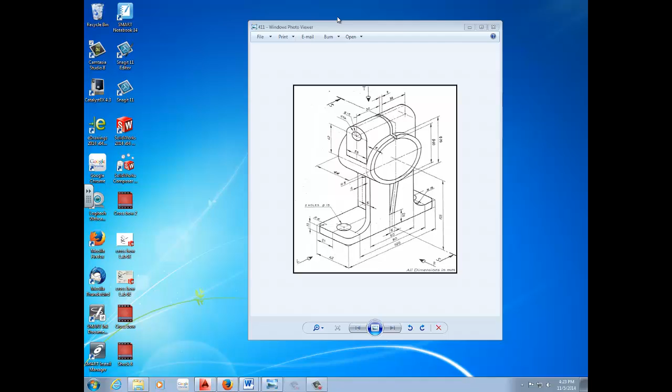So we're going to be working on this project called 411. Basically, it's what you see on your screen right now. What we're going to do is design it in 3D and then make a flat shot to get the 2D drawings out of it. The fillets, don't worry about those till the end because they'll just make you confused. Once we have all parts put together, we union it and we put the fillets.

So we start out with the base, which is 42 by 120. So we go to rectangle command, click anywhere on the screen, D for dimension, we go 120 for the length, and 42 for the width. We place it on the screen by selecting our left mouse button.

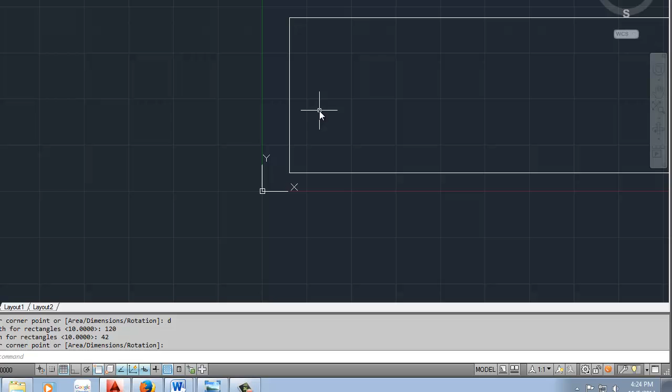Okay, so we have a base square. We're going to add these circles, which we need to place into the right location. To do that, I usually draw reference lines. So looking at the drawing, the circle here is at center. So I make sure that I have a midpoint OSNAP active. I hover over the vertical line here, and I draw a line across.

Is it specified on the drawing? Actually, it doesn't specify. It specifies the distance between the two holes, which is 90, minus the 120, gives us 30, divided by 2. So 15 is the center of our circle here. We draw a circle at that point. The diameter is 15.

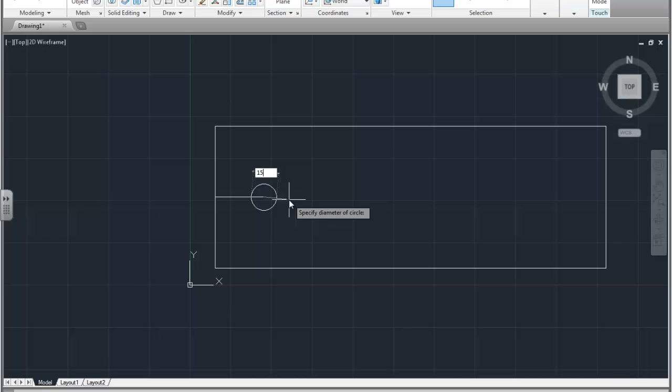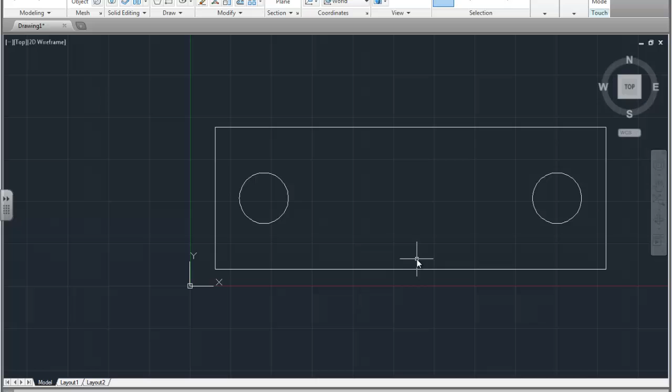And to make this project a little faster, all we have to do is mirror this over. So we use the mirror command. Modify mirror, select the circle, and we're going to create a line, an axis from the midpoint to the midpoint, and we accept. That gives us the base, which is 2D, which at this point we want to make 3D, so we do the press pull.

You can either put the fillets at the corners here now in the 2D drawing, or you can do it later in the 3D model. It's up to you. Both will work. We'll leave it for later. I'll try to keep fillets at the end. So what we're going to do is press pull, select the object, and the thickness is 10.

I'm going to change my view from 2D wireframe to conceptual. Gives me a better visual view of this. I'm also turning off my grid because I don't like using the grid. So that's my first piece, which is the base. Next piece is going to be, well, it depends on which way we want to work it out.

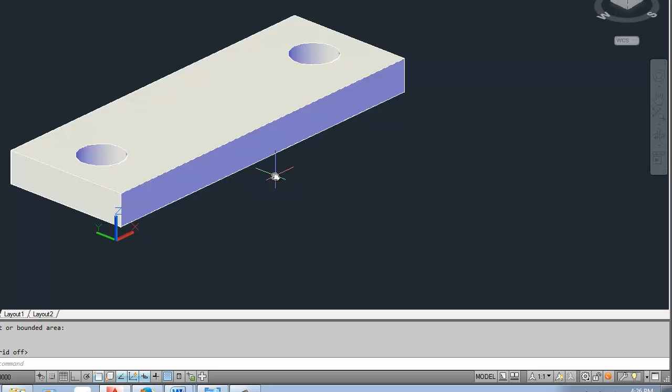We're going to have to work this piece here. It's going to be tricky because it has a circle that's centered. So we might just have to draw the whole front with the circle, and then we'll use the circle to create the actual cylinder. This might be the easiest way of doing this. And the final part, we'll do this top piece here a bit later.

But we don't want to cut the hole yet until we have this top piece here, because otherwise it'll be really hard for us to do that unless we cut through twice. You'll see what I mean in just a bit. So basically what we have at the bottom is like a T. So we can draw it that way, or we can draw it from the front, which might be the easiest way of doing it. So we're just going to do the front view of it.

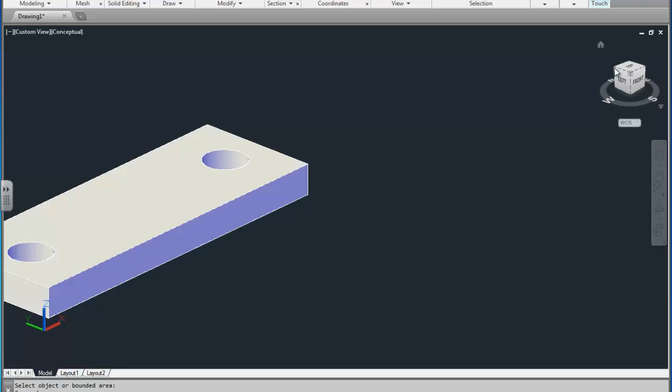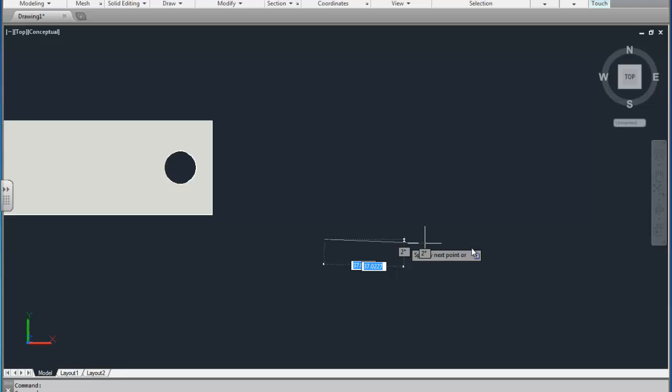We can keep on drawing this on the top. Doesn't have to be the front view because we're going to rotate it later on. So what we're going to do is create the base. So what I'm drawing now is this 60 here, from here to here, and the height I will have to figure out based on these dimensions here. So a little math will be necessary. Draw a line, horizontal, make sure you have ortho on, active, and you type in 60.

From that, we are going to draw a line that goes all the way up to the center of the cylinder at 105. We'll actually draw the cylinder now. That way it makes us understand exactly what we're drawing. So this is diameter of 70, and the inside is diameter of 60.

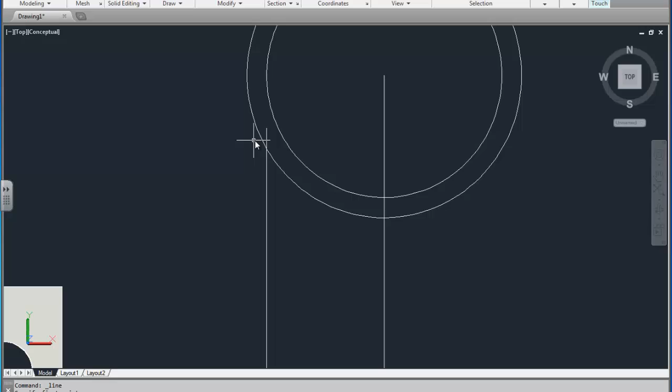We have that. Now the 60 is attached directly to the outside cylinder, so we go directly vertically up, and we trim off any material we don't need. From there, we also mirror it to the other side. Modify mirror. And we have the

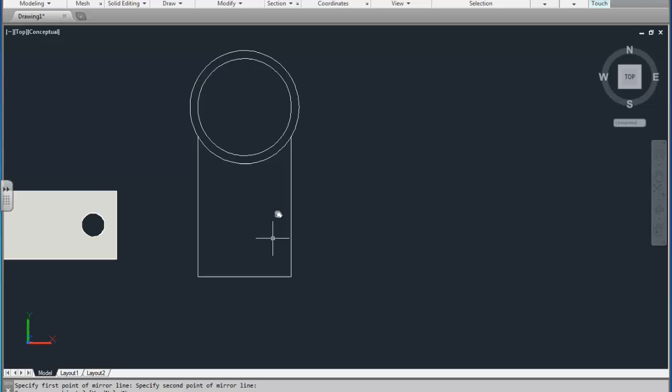base. The only problem with this is the dimension that I placed in here, the 105, is from the bottom to the center of the circle. What we actually wanted was the top plane here to the center of the circle, which is, based on the drawing here, 10 millimeters less.

So what we need to do is either stretch this up 10, or we move this up 10 and trim it. I'm going to show you guys how to stretch. Hopefully you guys know this by now. If not, this should be a good refresher.

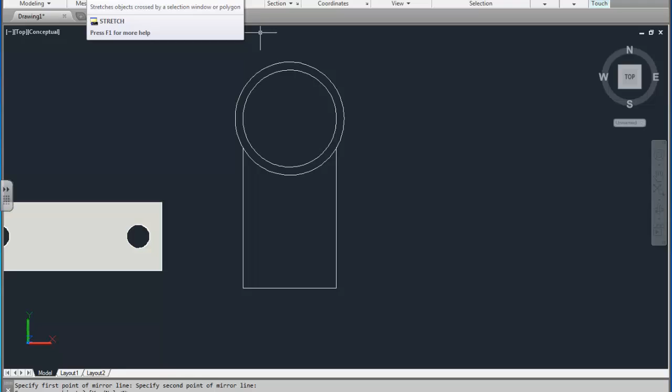We go to our stretch command, which is right here under copy. We select the bottom complete horizontal line and both vertical lines. So anything that's inside the box now gets moved. Anything that is only partially in the box will get stretched or reduced.

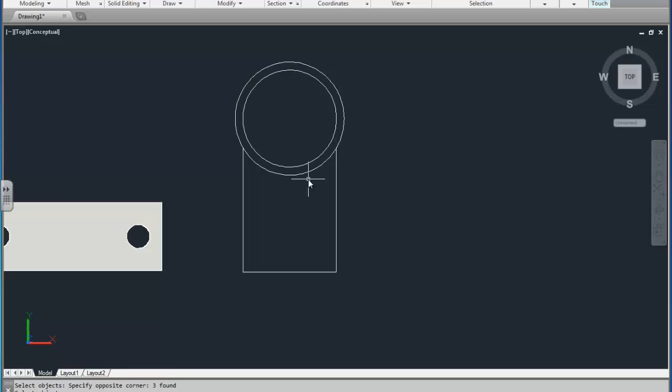So I select that object like so, and I click yes, these are all the objects I would like to select, and I click on a base point of displacement. It can be anywhere on the screen actually. So I'm going to click here, and I'm moving my mouse up, so that way it knows which direction I am stretching it, and I got to specify the distance, which is next. I'm going to specify 10. So it shortens to exact right distance.

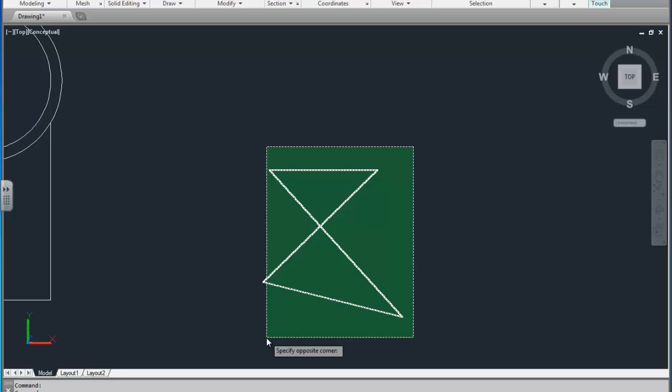Now I'm going to show you maybe a few other examples of stretch. So if I have stretch command and I select, as you can see, there's two full lines in the box, and there's 2 lines that are not completely in. When I do that, I select enter, you can see that the 2 that are completely in the box, they're there, the same exact shape, the same length.

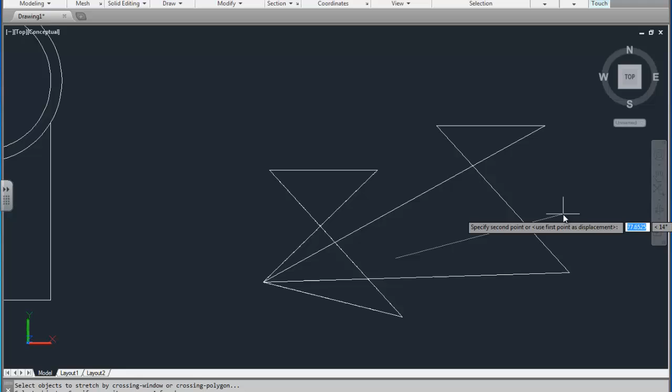They don't change. The other 2, well, they can just stretch and flip around depending on which location you're placing them. So you can really modify objects pretty fast and efficiently using stretch, but you have to get used to using it. That's the only problem. I'll try to implement it more during class so you guys get a better hang of it.

Okay, so we have the base. What we need next is we can take this part here, so we can actually trim out what we no longer need. This is the part that we want to press pull, and we have a press pull of 6 here. So you can go press pull, and we're going to type in 6.

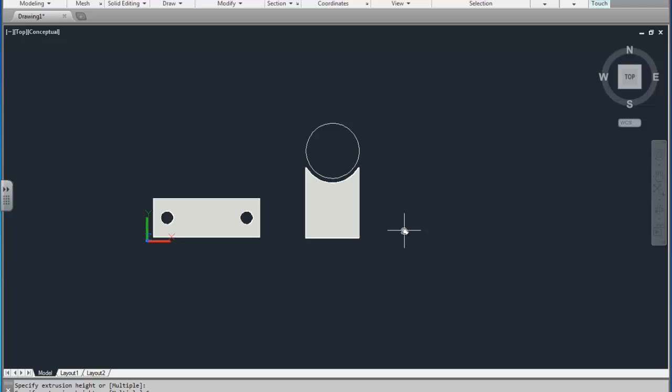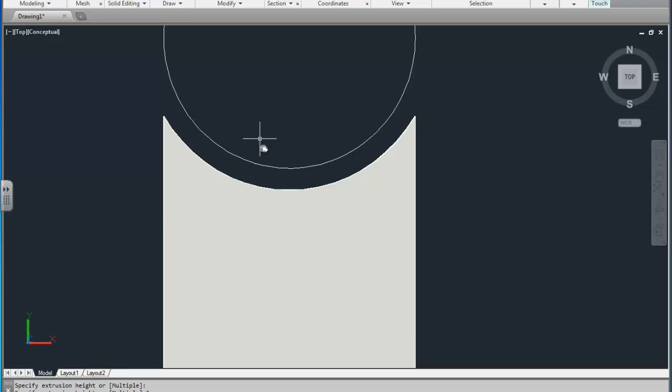In addition, there is also a triangle that we're going to have to work out. Actually, that one's going to be really tricky, but we'll be able to do that. So we have one more, the front triangle. That's the tricky part right here. There's a few different ways you can draw this. You can draw a triangle, extrude it out. The only problem with that, if you do the triangle and extrude it, it's not going to follow the curve of the cylinder. So we can't really do it that way.

What we need to do is actually get this top piece and the back, or actually we can do the bottom piece from the bottom, which is a little curved on top, and a square, and we can extrude it out and then slice it at an angle. That is one way, and there's multiple different ways you can do this. You can also do a loft, where you will create the top and the bottom, then loft it together. But that is also difficult.

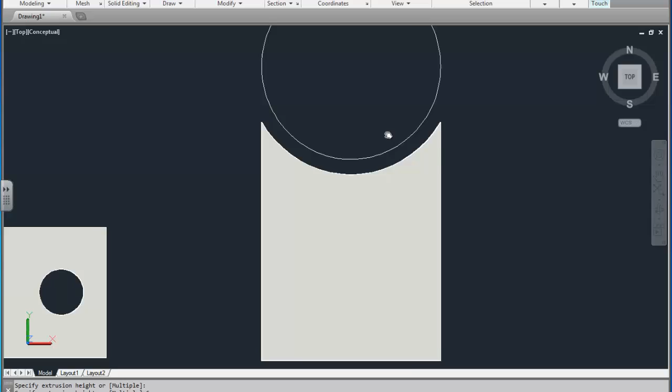So this is how I'm going to do this. Do I need to use this? No, not really. I'm going to create the same circle size that we had previously. I'm going to move it over because I no longer need it for this part. And I'm going to create this bottom piece as if I was looking from the front view. So I'm going to create a line, making sure ortho's on.

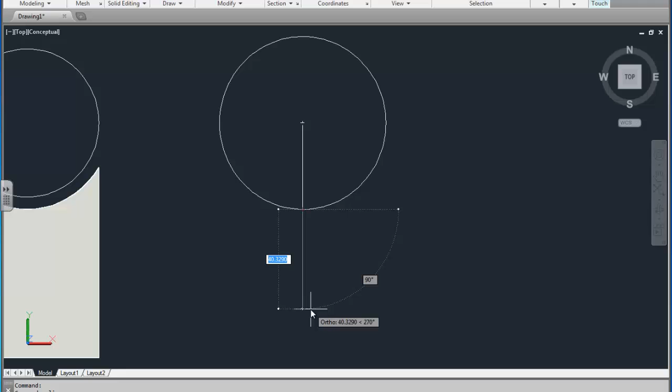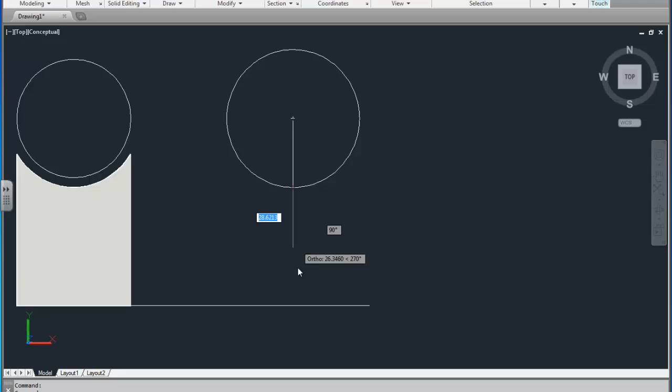I need quadrant now. So this is our new OSNAP that you need to have active. It's quadrant. We snap on to the quadrant and we're going down. Oh, this is tricky. They didn't give us the math. What they did was they gave us dimension from the bottom up. It can be easily resolved. I can draw a reference line from this bottom piece over here, and draw this line here that connects to this, except I need perpendicular to snap to it, and I'm going to go up 20.

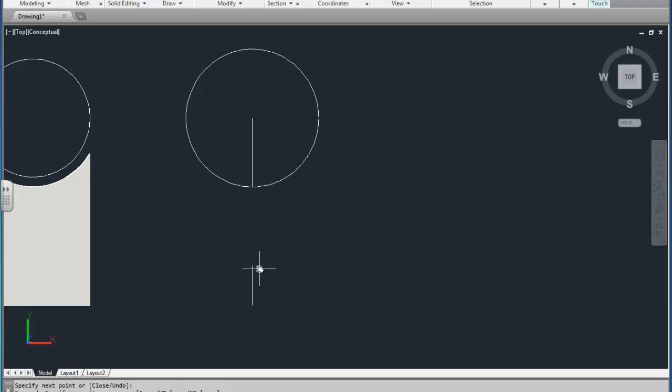So that would give me the distance here for this triangle. Now that looks a little difficult. The other option would be to use some math and figure that out, get the dimension. Actually, this is kind of short because we're supposed to add the additional 10 at the base, so this should be up 10 more. I'll give you guys the dimension. It'll be probably easier than doing all that. It is 30.

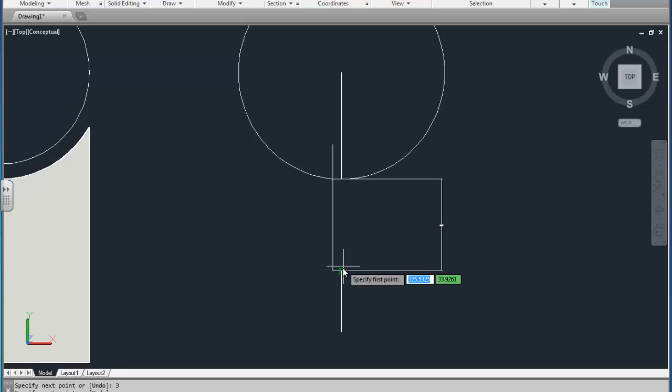Back to this. So basically 30 is the length of this triangle here, this rib. So it's 30 and it's 6 across, so we're gonna do 3 inches apart, so that makes it 6. So 3 this way and 3 this way. Delete all these and trim out that. So that's that triangle. It's curved at top. So that's the tricky part that we needed to create.

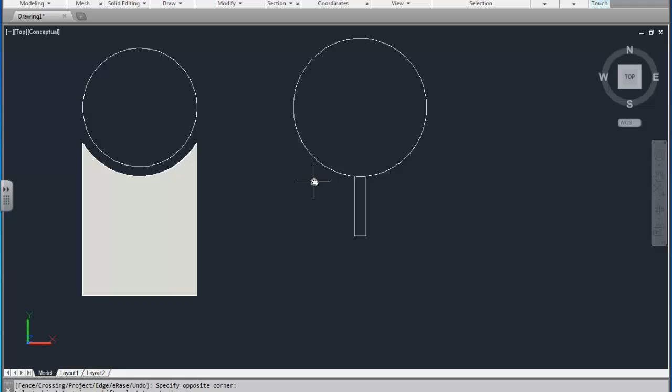So for our option here, I'm trying to look at the drawing. What we're going to do is trim off the rest, or you can leave it as is, and press pull this 6 up. That gives us something like this. The only problem is this should be a triangle, so it should be cut at an angle.

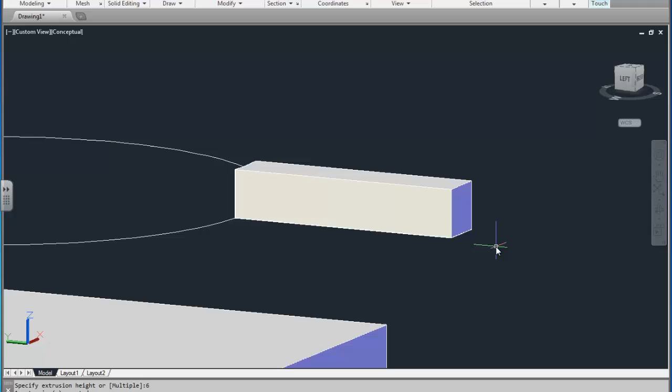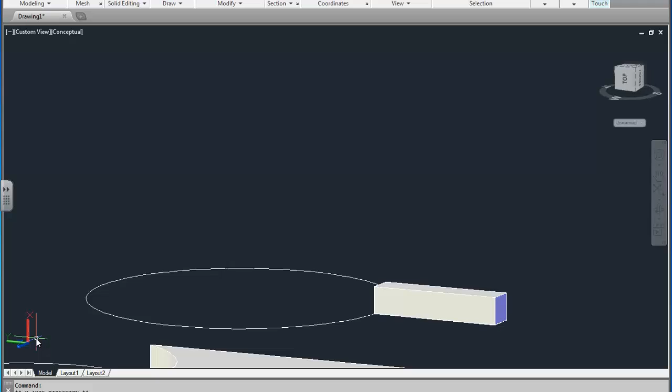To get that angled shape, we're going to use the slice command. We might have to change our UCS, which we do. We need X and Y to face us and Z to face toward or against us, so that we're kind of drawing on this face.

If I had X and Y on it, it would be like we're drawing on this. From there we go to the slice command, select the object, and draw a line from corner to corner, just like so. We can delete the top portion now, and that gives us that rib.

So we're slowly building up parts that we need to make this whole assembly. In addition to that, we also need to create the back piece, which supports the whole top structure. And that will be based on some math as well.

This is 6, 42, so we end up with 36 in length for this part, and the thickness is specified at 6. The only problem again here is that the top portion will be matching to the cylinder, so it's going to be curved a little bit.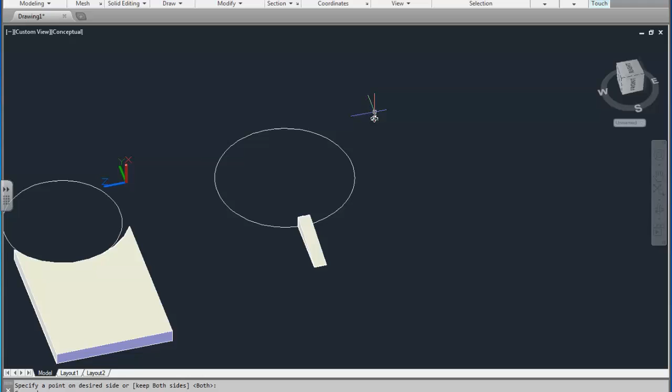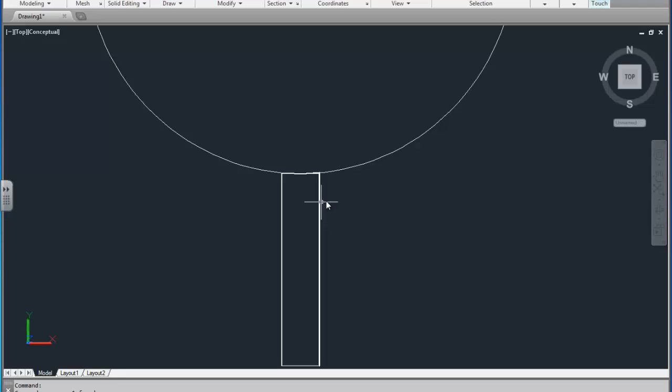So what you can do, since we have that curve that we need here - top view, my X and Y, my UCS changes back to normal. I'm going to take a copy of this, explode one of them, and delete anything I don't need. Actually, I don't need any of this, come to think about it.

I would just use that to create it, but looking at it, we can just do the same thing over. So we'll create a circle of the outer diameter, which is 70, and I'm going to move it over.

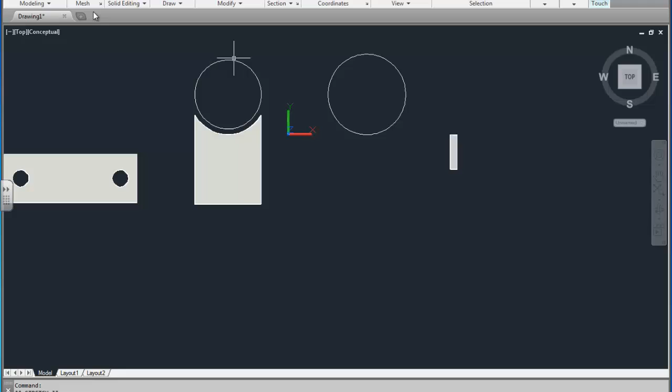Then once again we're going to create that line, but this time we can go all the way down. From this point down it's going to be the same as this distance, so we can use that as a reference, like so. Maybe this time I decide to offset 3 instead of creating 2 lines, but I need to extend this to snap to the circle, the arc shape. Then finally I close it up.

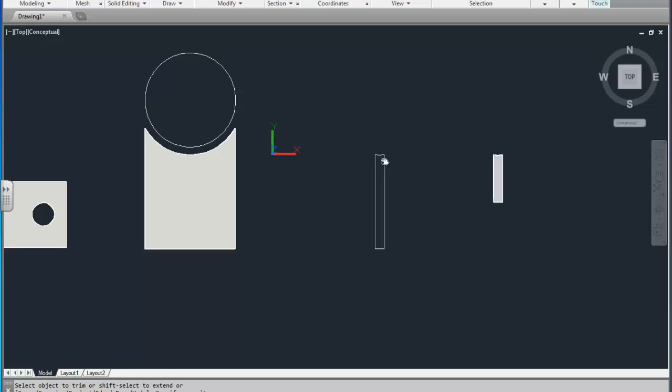I can even trim the top, giving me the piece I need, which I need to press pull at a distance of, like I specified before, 36.

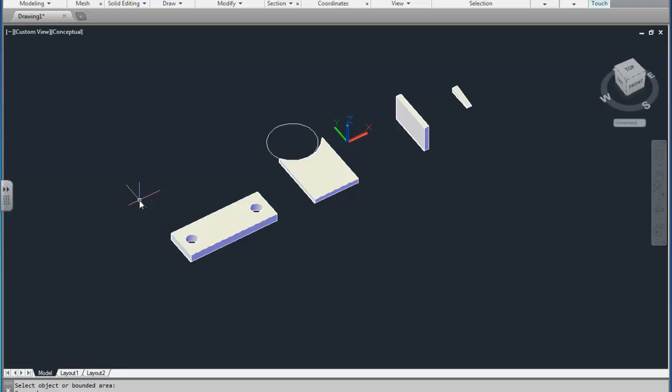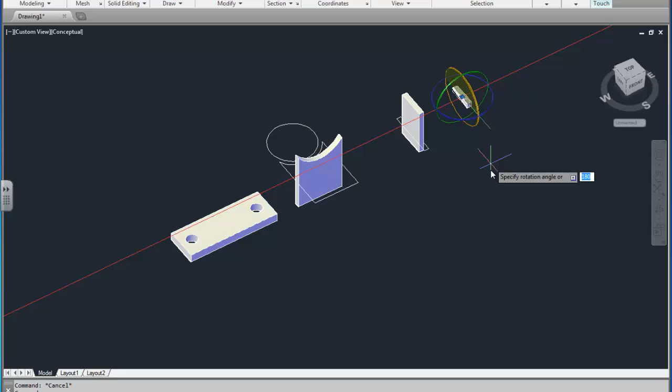Now if you guys want, you can put them together as is for now, and then add up the top. We'll do that, and I'll make sure everybody's caught up so we can move forward. I'm using the rotate gizmo - in the home tab, gizmos, I changed it to rotate, selecting all the items I need to rotate. Most just need to be rotated vertically, and then placed together using the midpoints.

So as you can see, it perfectly matches. It's supposed to be finished all the way to the end, which it does, so my math was right. And we got the first portion of the design completed.

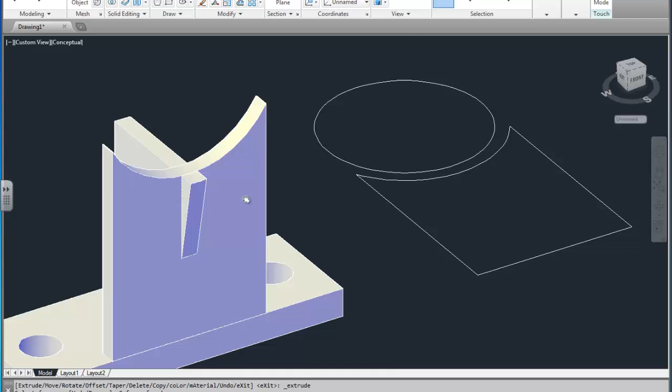Okay, so I made a mistake on that size for this wedge or rib. It's supposed to actually be 50, not 30. So I'm going to have to change this - that's the problem. But okay, this is an example of how I could change this without working too hard on it.

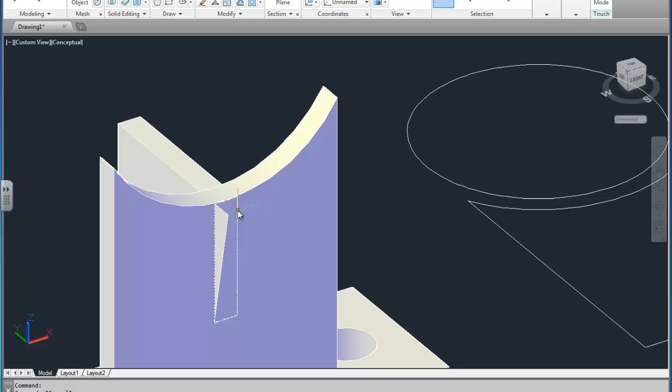Example would be I'd explode this, remove all these faces except for - this one's tricky - this one face here, where I'm going to explode it once more to remove the surface. So it becomes pretty much a 2D drawing from which I can actually stretch.

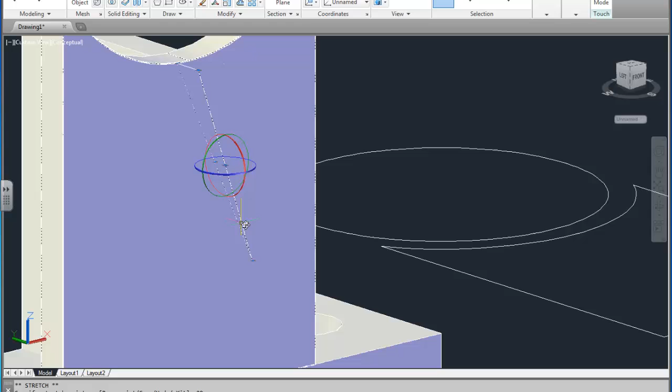So I can select these 2 lines. I'm going to stretch it down 20. Oh, it didn't go the right way, did it? I went angled because I got the wrong UCS set up.

Let me go back. I'm going to change that to the right view so X and Y are in the right coordinates. I've got to select both of these lines here. Oh, if this is in the way, what you can do is select the object, right click, isolate, hide object - that's not going to interfere anymore. And I can stretch this down 20. Right? Oh, what's going on here?

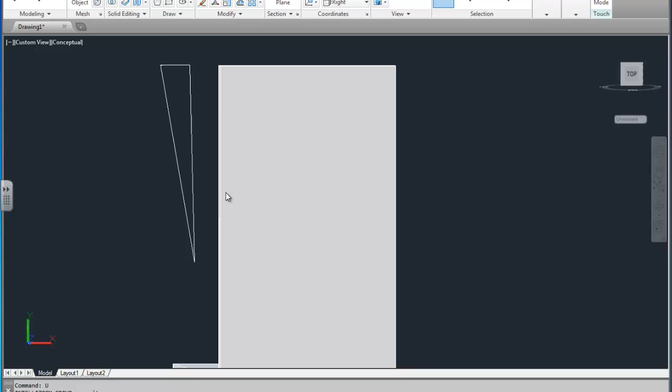Oh, it's already screwed up from the beginning. Undo. Okay, now I'm back to normal.

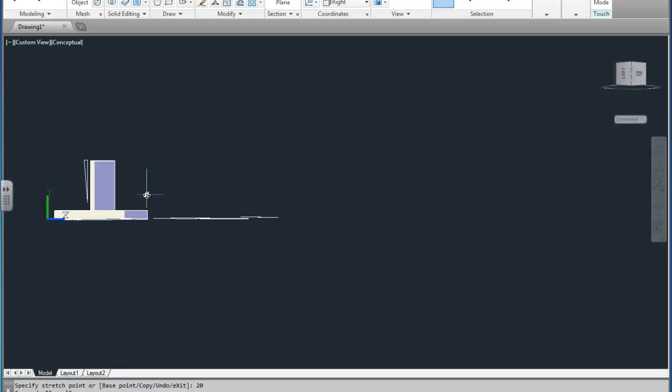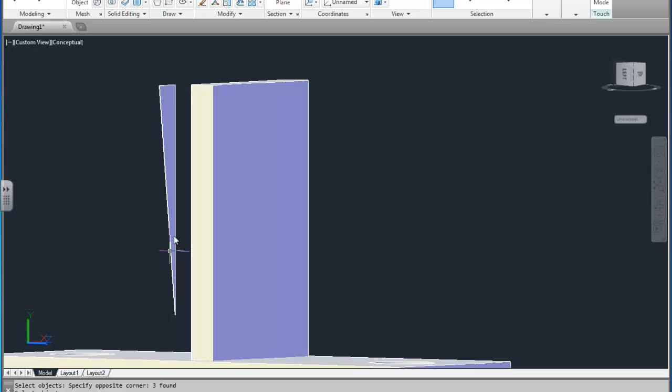Go back to that right view, isolate this part, select this, stretch it down 20, and that looks about right. From there I can just press pull this. Oh, if I can't press pull it, I have to make a region out of it and extrude it. So I can go to region, and then I just extrude it 6.

Then I go right click, isolate, end object isolation, and I'm back to normal. So that's how I'd fix it. Explode it, use the same sketch to extend it out a little bit. Normally I would change it in 3D, but since the point I need to stretch is just a line, it's almost impossible to stretch the object. So it's just easier to do it that way.

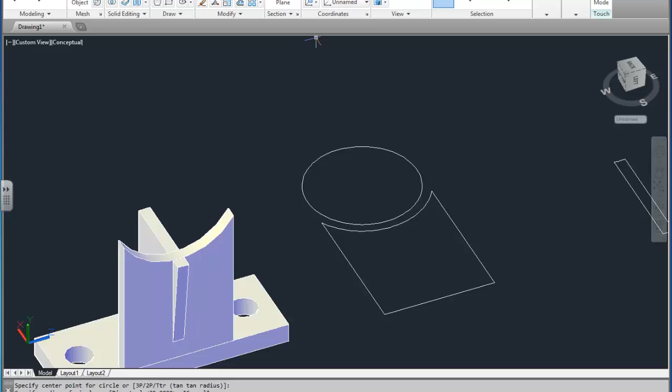But once we have that, what we can do is create the circle. So I already have the sketch set up here. Just need to change my view to top view. I'm going to go with that circle. And I have this shape I'm looking for. I just need to extrude or press pull this cylinder out, and the length of it is 44.

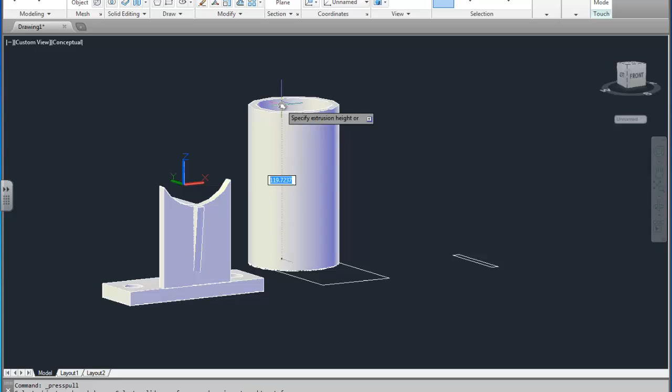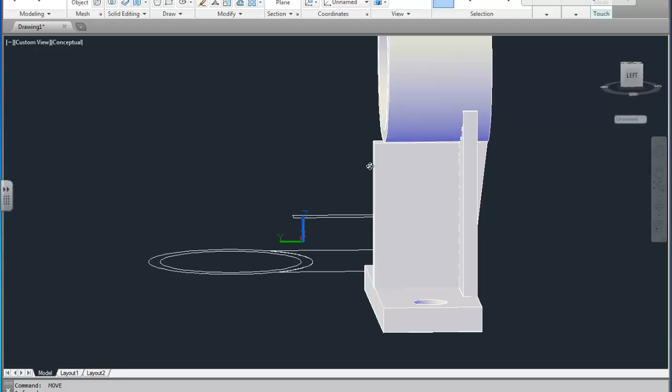Oh man, there's something wrong with this thing. Am I getting this right? 44? Okay, and I'm just going to rotate this around and position it so that it fits right at this. Looks like it's shorter, but that's what it's specifying. It's 44, so it's 44 up here from the outside to the outside, so that's our actual cylinder size.

But if you look from here, it's 42 from the base plus 6, so that would be 48. And this is flush here, so I guess it is shorter from the back. Is that what you got? I think the drawing, that 6 is off.

So we have that part. Then we can finally, actually we need to subtract this rectangle, but we're going to subtract that rectangle later on. First we're going to design that side portion, which is this right here. So we're just going to do a simple, we can just draw it on the top view, so we can always rotate.

It's a pretty simple piece. It's just a flat bottom at, what is that, 28 or 26? That looks like, well, we'll have to do math. Here's 14 for radius, so it's 28. 28.

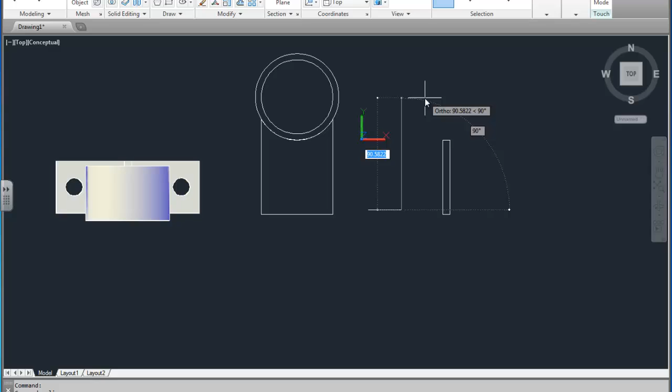And the height, unspecified, is from the center of the radius. Looks like it's not important what the height is as long as it doesn't go over the cylinder, because it's going to match almost flush with it.

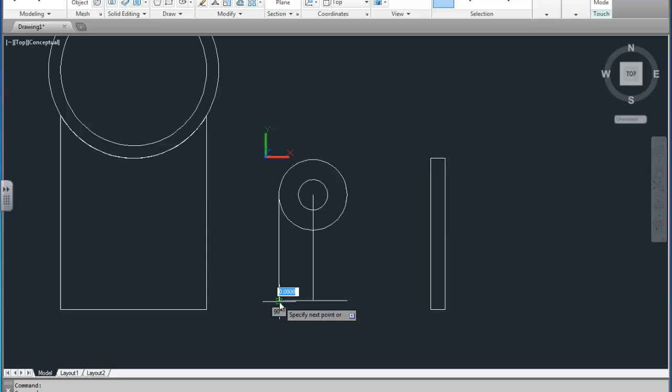So what we're going to do is we're going to still create that part. I'm going to create a center line for the 42 where the circles are going to be placed, which is the radius of 14, and one that has a diameter of 12. Close that up like so, and trim off what's not needed.

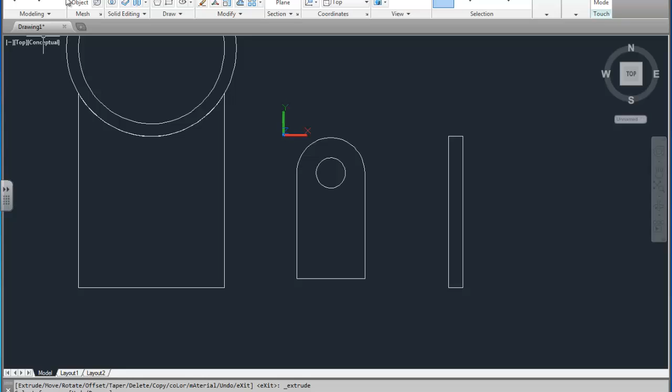We can always adjust the actual height later on. So I'm going to keep it as is, but I'm going to have to presspull this all the way through at 32 plus 32 plus 3. So we're going to presspull this object. 64 plus 3 is 67. There we go.

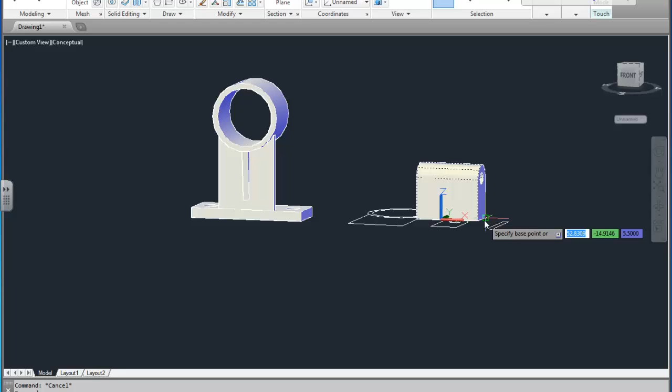And I'm going to rotate it around and place it onto the actual cylinder. It's specified that 6 inches off. So I'm going to go from the center, go from the move gizmo 6 inches back. I mean 6 millimeters back, and I went the wrong way. Come back.

So, oh, it's not even center. Center the midpoint to the center of the circle. But you want the end of the circle, so like that. And now we can move it back 6.

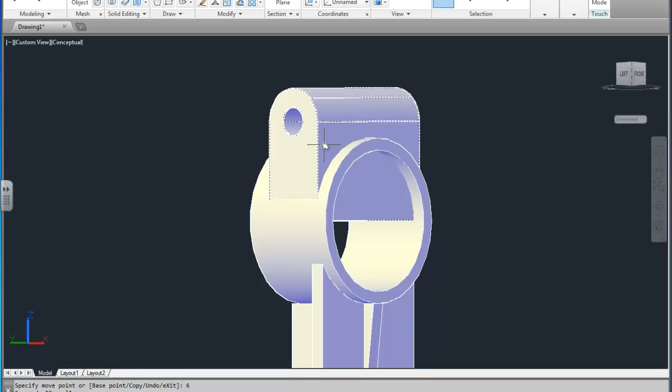That creates the overall shape, except we have to verify that the center of the circle here is 42 from the center of this circle, which is going to be tricky.

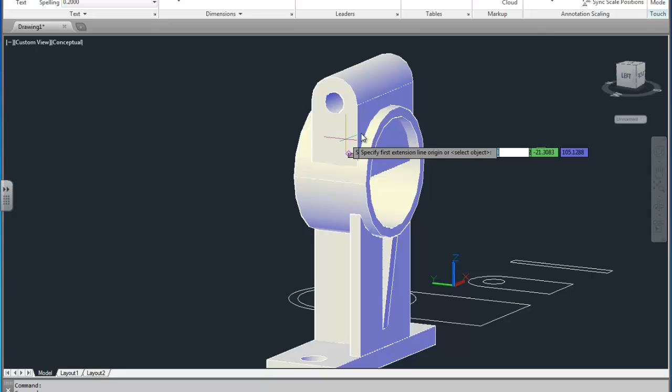So I'm going to create a reference line across, and I can do a dimension from the center to this line. Oh, I've got to change my view from top to the right view, or the left view actually, based on this drawing. And now I can check out the dimension here. 42, perfect. So it is correctly placed.

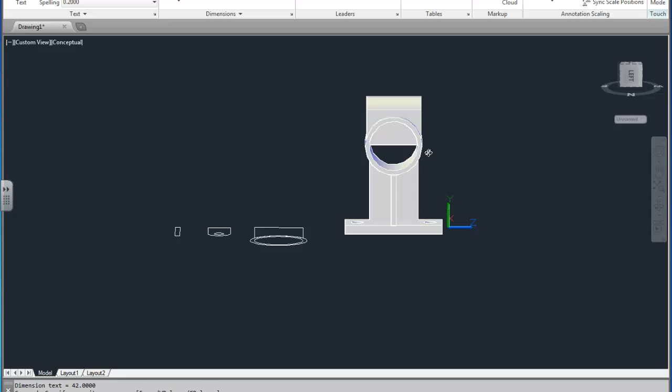The only problem is I have all this material inside, which I need to remove. So I can actually just draw a circle that snaps on from, of course, the top view. Is that what I'm looking at? No, front view. Create a circle based on the center of that main circle. I'm going to have to extrude.

So here's the trick. If you can't select an object because there are so many things behind it, what you may want to look into is selecting in a blue box and doing extrude. And then we're going to do subtract. Subtract from this outer cylinder, this inner cylinder. Oops, sorry, not the cylinders. I was supposed to select this top piece.

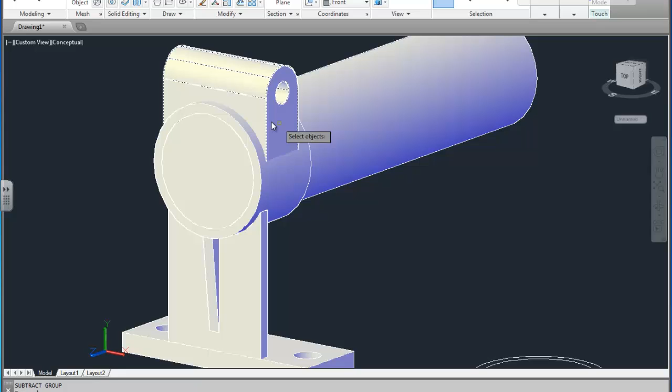From this piece, I want to subtract this part. That gives us that. In addition to that, we also need to create a rectangle that removes all this top material.

That top material is going to be 3 millimeters wide. So you just gotta do a rectangle anywhere on the top plane. D for dimension, we're gonna go 3 across, maybe 42, actually a little higher than that. We'll do 60 high.

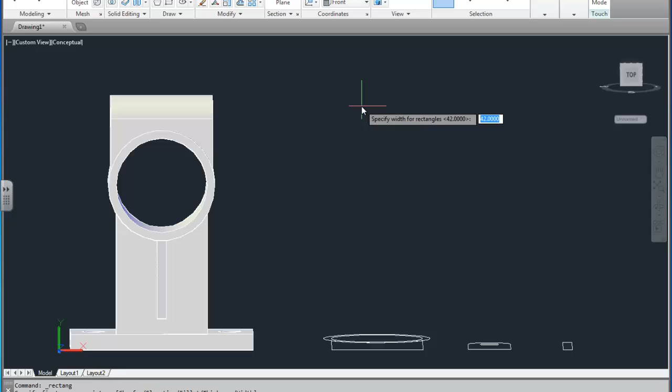Then I move that over to the center and make sure that it extends over the part. If it doesn't, you can just stretch it as needed. Doesn't matter what shape it is, as long as it keeps at 3.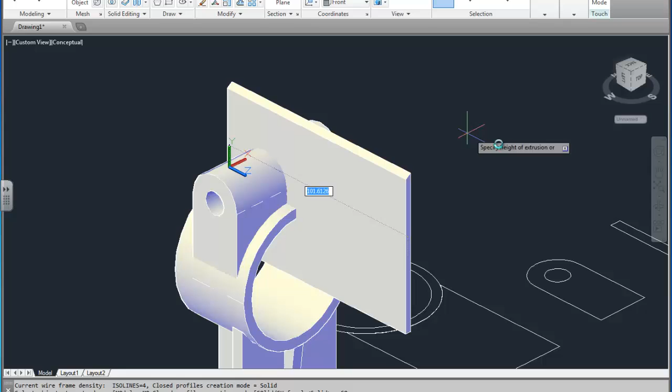And then we go extrude, goes all the way through, and more. Make sure it's positioned that it goes through both sides. And we subtract it based on these 2 parts this time. And that gives us our final piece.

With this, yeah, and then except we have to union all this. Before I union, I always make a copy just in case I need to modify some part, it'll be easier.

And then I union it together. Becomes one piece. Oops, I missed one. There we go. And I can add the fillets.

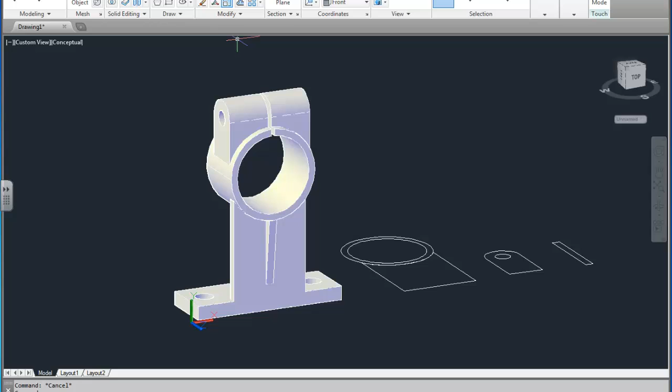Solid fillets, there's a few of these. So our radius 6, I'm going to use the base first. It gives you a nice preview of it before it actually creates it. And we create the base.

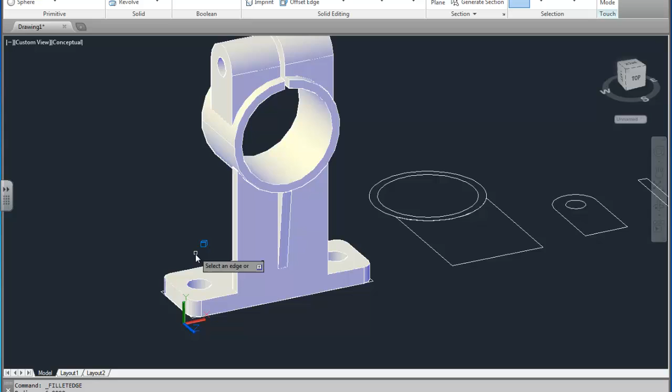Then we need a fillet for here, which is going to be 16. So radius 16, like so. And we accept that. There's also a radius up here, looks like.

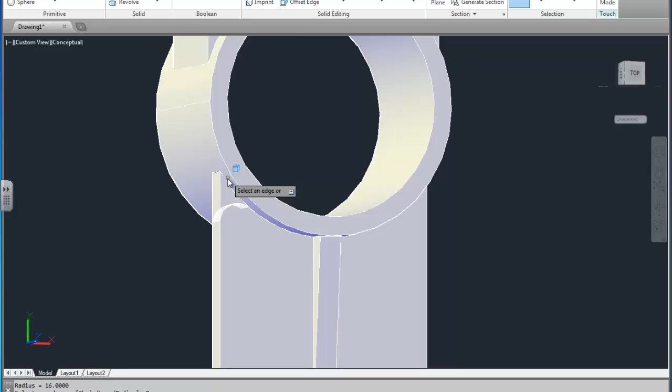So we're going to go fillet, I'm sorry, it's a fillet radius of 5. No, they can't be right.

So once you have the item completed and unioned, what you want to do is do a flat shot. So at this point, I'm going to remove these sketches, I no longer need those. And to do the flat shot, we'll also need to remove any existing drawings I have on the side.

Of course, if you want to keep everything else, just make sure you save it. And again, actually, you should save it before you even do any changes, or before you do flat shot, because flat shot becomes a little technical, and some of this data can be lost.

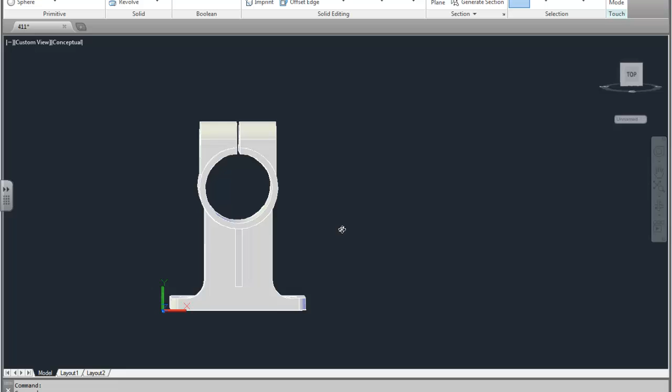So once you have your drawing open, you go into a specified view. So at this point I'm at front view. I'm going to type in flat shot.

It's going to give me an option for inserting a new block, replacing existing block, so forth. We're just going to insert a new block, so we keep all the defaults. We say create, and we place it on the screen. The scale is 1, so we click enter, and 1 is the X scale. It also wants to know which angle to place it at, so we click it here and place it. So that's our first one.

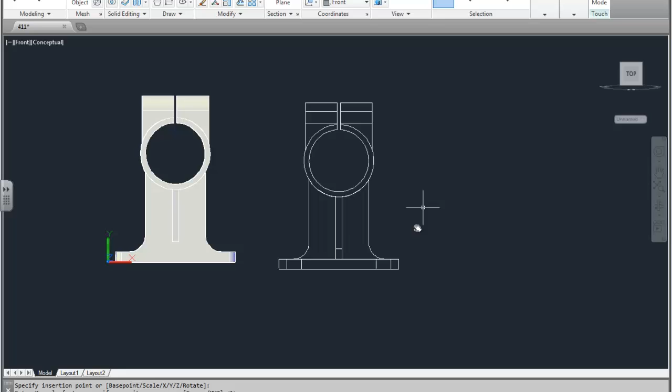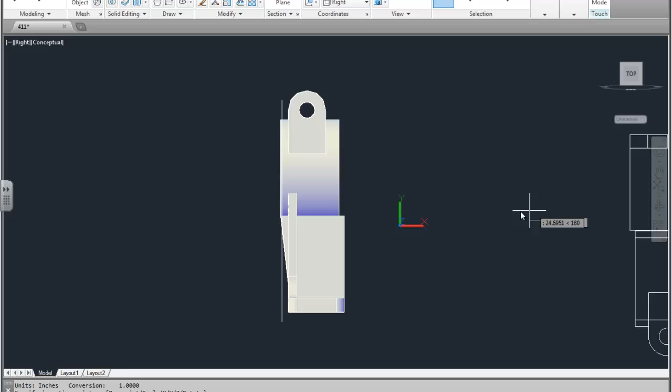Now we can go to, let's say we go into a right view, or left, up to you. Maybe right, yeah, right view. Again, flat shot. Create as a new block, place on the screen, click enter, enter, and also you have to click once more to place it. Okay, and finally we want the top view, so we go to top.

We go to flat shot, create, click on the screen, enter, enter, and also place it once more.

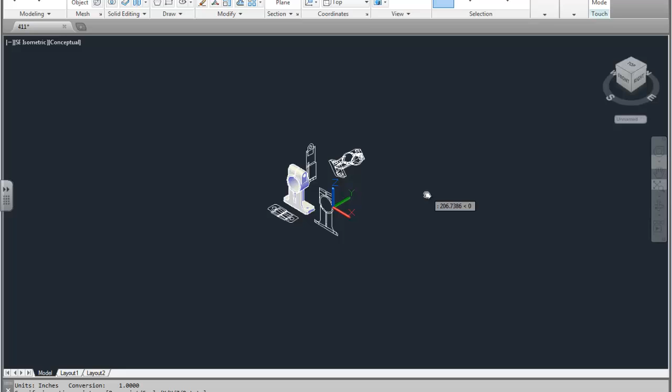Which actually might not be the best, but we'll leave it as is. So that gives me my 4 drawings.

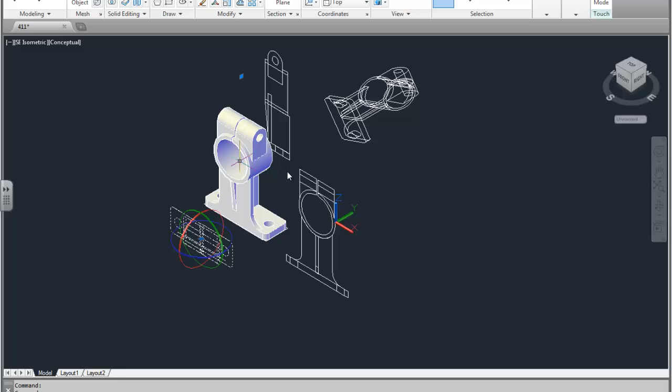You need to rotate these using the move gizmo, or rotate gizmo. Select them, rotate them to face the same direction so that I can put them on a page. So they're all the same kind of view.

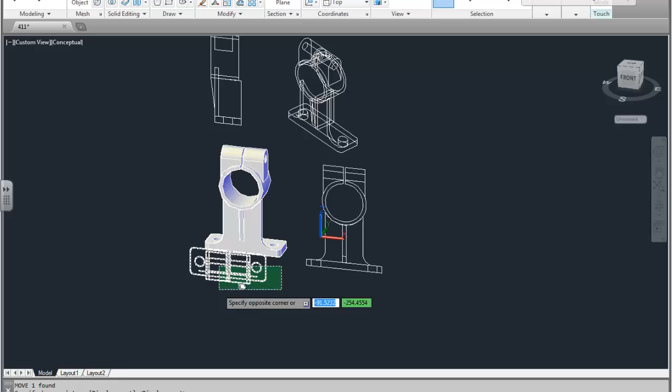What I can do is I'm going to copy them and put in my, technically I should have a template, but if I don't, that's alright. Or I can actually, I'm going to leave them on the drawing here, so that way if I put dimensions, if I change anything, I won't lose anything.

I use midpoints to make sure that when I do place the object, it's exactly aligned. So everything is uniform, and there we go.

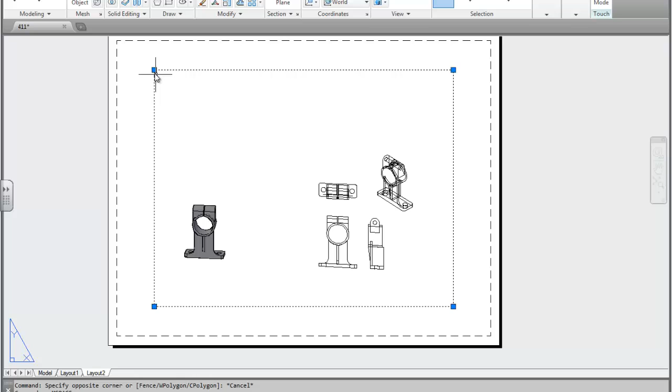Except that I gotta place that in the same XY coordinates. So now if I go into, let's say, view, I have, make this smaller, the viewport. Well, actually, maybe I should make that bigger. That isn't quite aligned. Oh, because it's not set up for front. There we go.

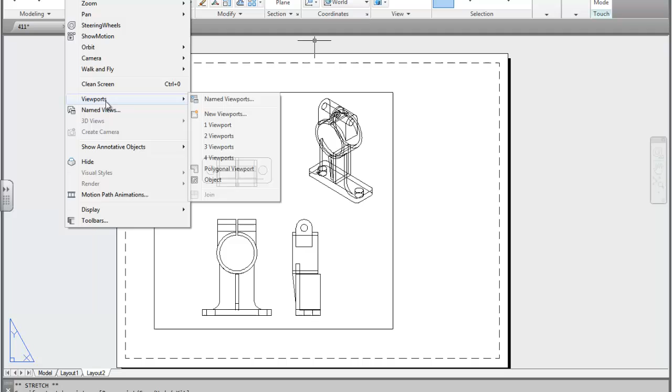And in addition to that, I can also put a viewport for the 3D, at which point I would go into an isometric. And I would still put all the different dimensions on my model space.

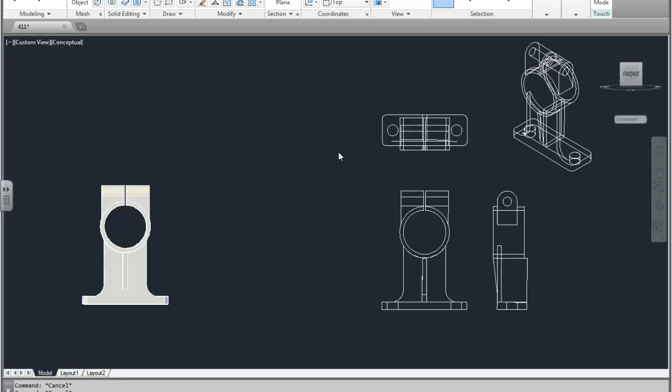You could add additional dimensioning for the ones that were missed from the original drawing that you received. So if there's anything missing or you feel like you need to clarify better than what it's being shown here, you can do that. That concludes it.